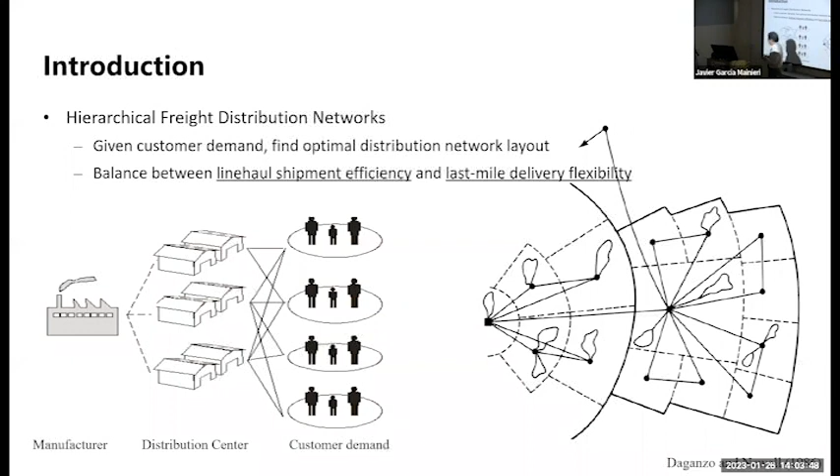You don't want a truck to visit you every day, do you? I hope not, because it has a lot of implications for safety and energy efficiency. So then the line haul, which is the part where you use a large vehicle to deliver to a neighborhood of customers, and then use smaller vehicles—you deconsolidate and break the bulk, then use the last mile to deliver to local customers. This last mile is much shorter in distance overall.

If you look at a delivery system, the line haul distance covers most of the distance traveled, ton-miles, whatever you call it. But the last mile is relatively very short in distance, yet it's actually more costly because you have to use smaller vehicles to visit customers, and it's less efficient in terms of cost. It turns out that last mile delivery covers more than half of the total cost, just because it's less efficient. So it's an important part of the puzzle.

Particularly in recent years, especially after COVID, with information technology booming, the last three years have really changed the landscape. E-commerce has been booming across the board, everywhere. I'm sure you order much more online than you did a few years back—at least I see that happening to myself. This has been a trend, and we think it will probably continue even after COVID ends. In the US alone, just to give you a number, in New York City alone, every day there are 1.5 million parcels or packages being delivered in a single day. So you can imagine how this has been changing.

In the past, you'd go to a store, drive there, pick something from the aisle, and go. But now it's actually delivered to your door, more and more so. Then the last mile delivery, mostly in the past, has been dependent on vans.

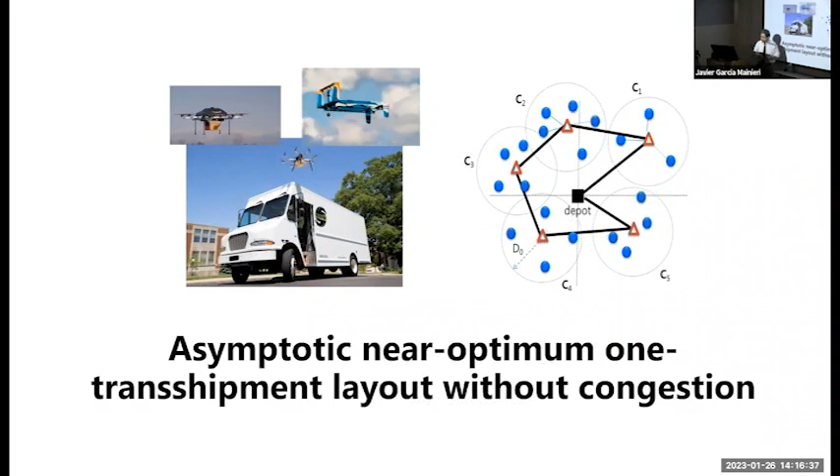So it turned out that what we're going to do is look a little bit into this system first, maybe as our first question to answer: if we were to do this type of system design - the trucks go out and temporarily stay somewhere and let the drone go out - what is the optimal way to do it? So this leads to this research question.

Suppose this question is the basis for the design - suppose we have a homogeneous area of space, just for the property of the mathematical system - essentially if you have a vehicle, the truck or floating warehouse that's going to be going around, how should this floating warehouse go around? What is the best way to route it? We want to save some distance that this truck itself has to go. Let me use 'truck route' to mean the big vehicle. The truck is going to go around, and where should the truck stop? How frequently should it stop? And then each time the truck stops, the drones go out to serve the customers. And then how big should this area be, and what shape should it be?

This is a computational geometry problem. How do you partition space into small areas such that you have this truck routed through it and minimize the total cost for truck routing as well as the drone travel? I hope this problem makes sense.

So this problem, we started looking at around 2015. We use some approaches - I'm not going to bore you with the details, but I actually had a little quiz for you, though I forgot to give it. I was going to quiz you all.

Like, if everything is homogeneous, what do you think this shape should look like? Roughly would be near optimal. I already reviewed it, I apologize.

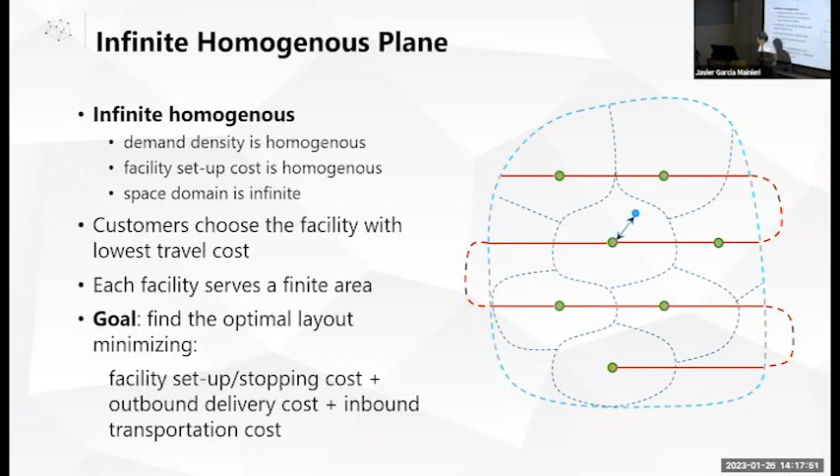There has been some research in computational geometry showing that if distance is measured, if drones really should be using Euclidean distance, that means going in straight lines, then actually hexagons are supposed to be good if we do not worry about the truck routing. But if the truck routing is actually under consideration, it turns out that this is not optimal.

I'm going to show you. So we have some results from the literature about how the space should be partitioned, but it didn't really consider the truck. So what we did in the past few years is figure out how we can route the truck.

There's some work that we did. I'm not going to go into the details, but essentially, it depends on: if the drones are flying directly, and if we do not worry about the truck at all, truck is free, then we should have hexagons. If the distance is by straight lines, but the drones have to fly according to a lattice—that rarely happens—but if that's the case, then we should have diamonds or slanted squares.

If we also consider that the trucks are going around, you understand that we have to find a way to connect all these dots—that's the truck movement. If we worry about this distance, which is a cost, then actually hexagons that are squeezed would be optimal. We prove that it's near optimal under different situations, and basically we prove that it's optimal.

So this gives you some guidance: under different situations, under different costs, you should partition space in these different ways. That's some of the work we did, and we proved it through some simulations.

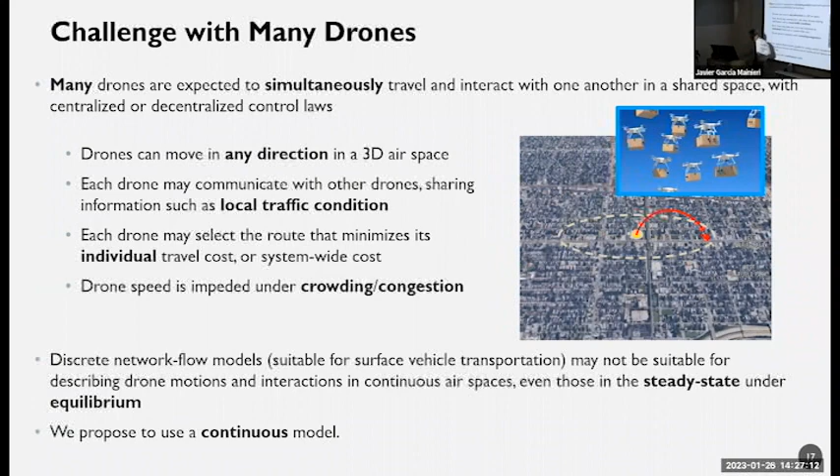So what we did is we utilized some of the ideas in the literature, and then we modified them to address this drone problem. We developed a so-called continuous model, a continuous traffic model, to describe it. This is only a few slides that have a little bit of math, but I will hopefully go through it really quickly. You don't have to worry.

Imagine this is one of the locations where drones take off, a launching location. Suppose this is the area around the drone launching location, and the drones fly out to serve this neighborhood. Then we can describe the local flux. We can imagine that in every little neighborhood in space, we can describe the local drone traffic by a certain flux variable.

And then we can assume that the travel cost of every drone in this neighborhood experiencing flux f(x) near x is the transportation cost per unit distance. It's like travel time per unit distance, like a pace. This is essentially an increasing function of the flux. So if you have too many drones in my neighborhood, I'm going to slow down. So this captures that local

congestion. You can imagine that if this is the truck stopping location, the launching pad, and these are the customers continuously distributed in the neighborhood, we have drones flying out, and in every location there's a flux, some flow going around. The speed for a drone to traverse that little neighborhood depends on how many drones are in that neighborhood. In this way, we can address drones flying in all directions, forming traffic, and causing congestion.

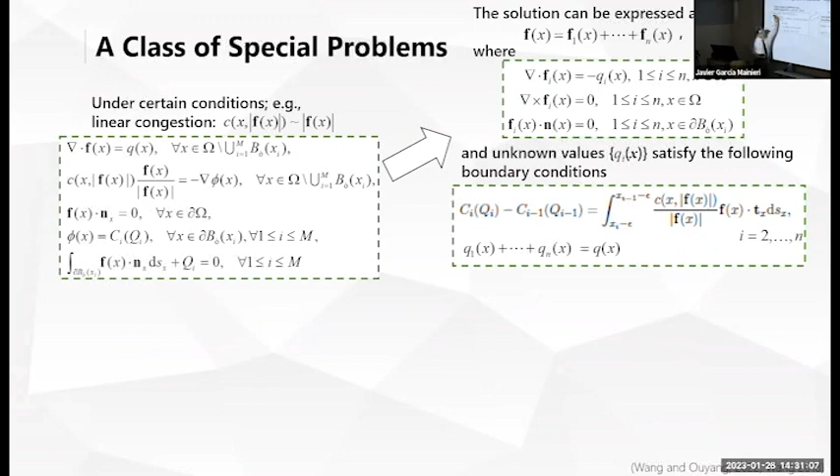Actually, I'm very proud to show you, but don't worry about any of this notation. This is an earlier slide. We were able to show under certain conditions, we can solve that partial differential equation analytically in closed form. It's not generally true, but for certain situations when the congestion function follows certain forms, we're able, I'll skip all this, we're able to solve the problem analytically.

I want to show this picture just so you get a sense. Suppose this is the area where demand is everywhere, this is where the truck is stopped, then the drones fly out or fly in, both ways. Then you can see this is actually the optimum path the drones should be following. This is actually a closed form analytical solution. This is the cost surface. In a sense, this is where the truck is parked.

As you move away, customer from here will travel the least cost way to the truck. I'm sorry, I should say the drone goes the least cost way to the truck. This is the cost value surface. And as you go farther away, there's more cost, obviously, right? But sort of the idea, this is how the flux goes.

Just to show you some solutions, this is also an analytical solution when we have arbitrary shapes of the area. This is a made up shape, but you have two trucks that are sharing the airspace, serving the demand. You can see some of the drones should be flying in a curvy way, just to avoid: there's a lot of drones in front of me, I should go around it a little bit, but you don't want to go too much around it. What is the optimal path I should follow to get to the truck? So these are some of the analytical solutions.

For our problem, we didn't really rely on the analytical solution because it requires a certain cost structure. For our project, we studied a more arbitrary cost function like this, almost like a BPR type of cost. Then this is a truck stop location, and we consider a domain around it, so we can imagine the customers are scattered in this area. That's my delivery customer. Then the truck is going to dispatch drones out, and then we can solve.

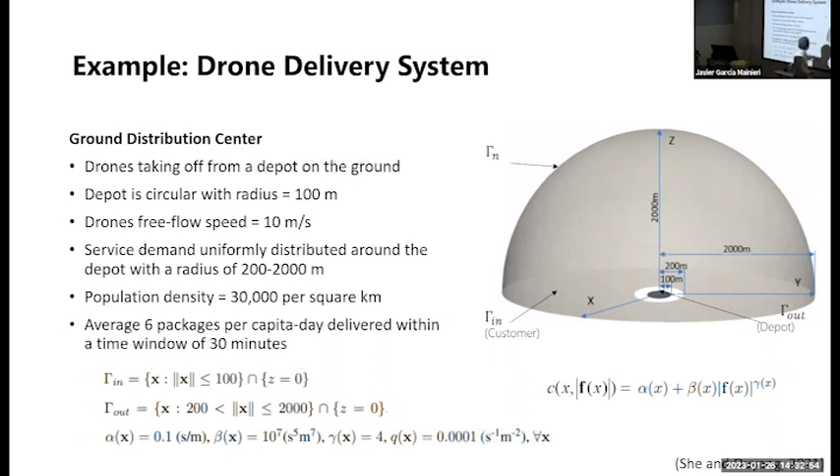I'll go really quick. We can solve partial differential equations by a finite element method. You guys are all experts, I'm not gonna bore you with it, but you can see we build this type of mesh, and then we use that type of elements. And then we were able to solve the problem and find out, for example, if a customer is here, how the drone trajectory should look.

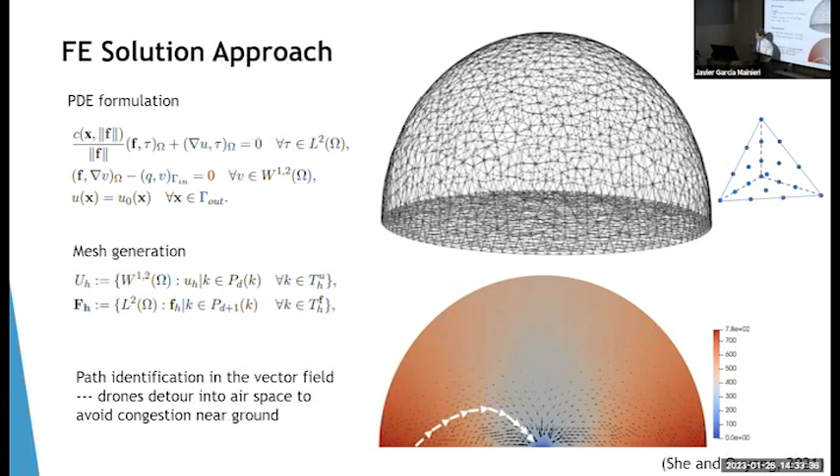See, the issue is that the drones are no longer flying near the surface of the ground. This would be the least distance way of travel, but because there is going to be a lot of concentration of drones around here, they have to go up and down to avoid the congestion near the surface of the roads. I don't know if there are any questions up to this point. I have been moving rather fast. Okay, if not, then we continue.

Then we did a lot of investigating the impacts of different factors. In urban settings, we may have barriers, buildings around, and even if there's no building in the rural area, maybe the FAA would have requirements that certain airspace cannot be used, like virtual barriers. So we were interested in knowing what would be the impact of the barriers. It's also interesting, for those of you familiar with network models, when congestion is present, having some barriers actually turned out to be better for the traffic. This is called the Braess paradox.

In a transportation network, sometimes you shut down a bridge and everybody is actually better off overall. That's because people are self-interested and behave for their own interest rather than the system-wide interest, right? Those of you who are familiar will relate to that. We were thinking that maybe the FAA should actually think about adding some barriers in a certain optimal way, such that the traffic can be improved overall. So that's what we did.

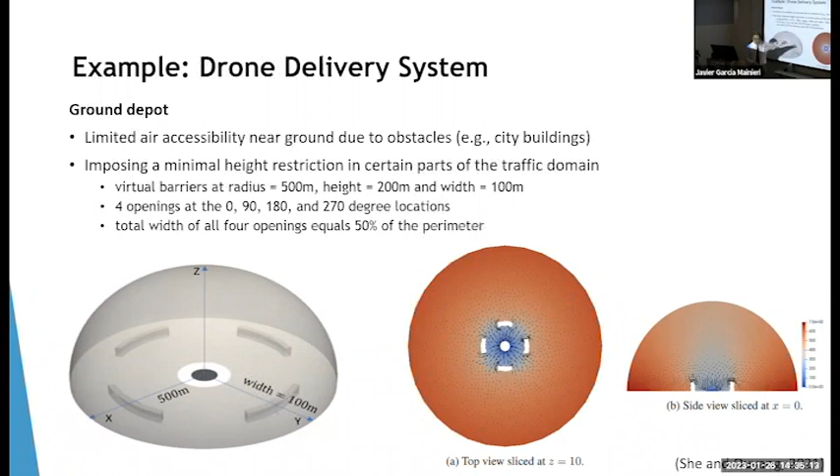We were trying different openings, as we call them: in a certain circle, what percentage of the area has a barrier, what percentage doesn't, and how high this virtual barrier is going to be. We tried all these different combinations, different ways of setting the barriers, different numbers. We can also evaluate the energy consumption as a drone moves up and down with or without a payload, and all kinds of movements. We can measure the energy consumption along the way.

I just want to show you a little bit. It's interesting: with some barrier, it's actually optimum in some cases. I'm not going to go into the details, but in some cases having a certain amount of barrier is actually the best. There's an optimal amount of barrier you want to add. If you add too much barrier, you're blocking everybody. This is not going to work. But if you don't add any barrier at all, it's not good either. You want a small amount of barrier sometimes to streamline the traffic.

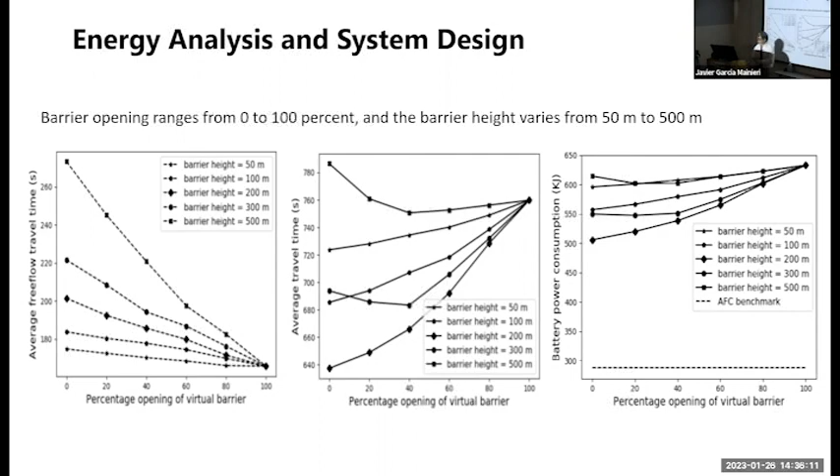It turned out that things work the best that way. So these are some interesting results we found, related to Braess's paradox. This is actually sort of a showing of Braess's paradox there. I'm going to go very quick now. We also studied the Amazon floating warehouse. Remember, that's another motivation for this study.

With this type of floating warehouse, the model changes just in that the truck goes to the air and then gets dispatched in the airspace rather than on the ground. We basically build the same type of mesh, similar meshes, and then we have traffic distribution and so on. You see how the drones sometimes, to avoid congestion here, go around and land from above. So you can see that congestion does have some effect on the traffic.

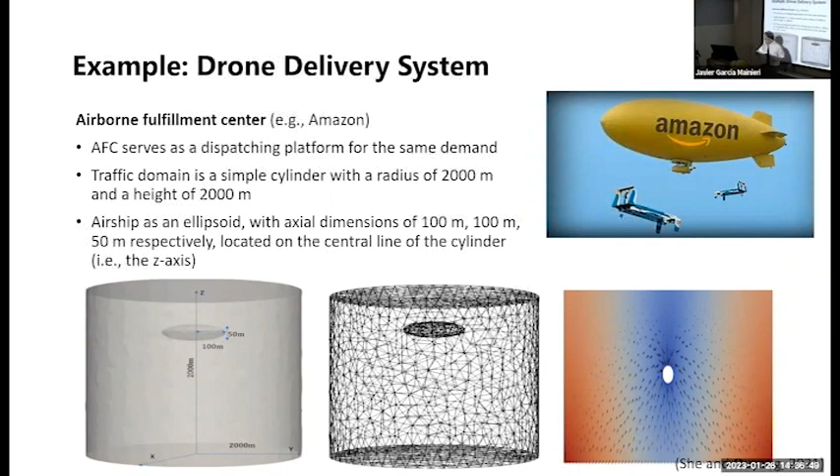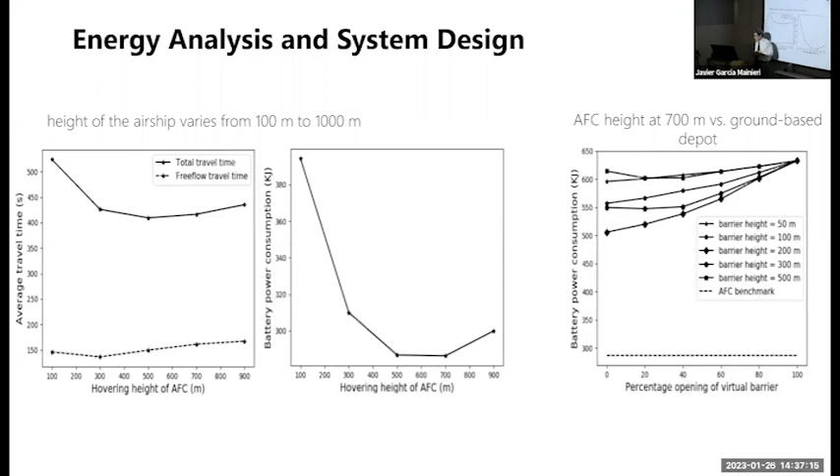We were able to play with this and try, for example, how high the floating warehouse should be. If it's too low, the congestion around it is too high. But if you go too high, it's too far; there's no need to do that. So there's an optimal height of the floating warehouse that's the best for the overall system. These are very simple applications that we play with just to have a little bit of insight about the system.

I hope I have time. How much time do I have now? Oh, I'm sorry, I'll finish in 5 minutes. I apologize.

Okay, so based on all the analysis, we were also able to show how we should partition space. It turned out that what we believe is the optimal way when congestion is present is what we call the curvy hexagons. So anyway, that's just to show you some of the work we did a few years ago.

What I'm going to do is quickly go over the last problem I haven't touched. I touched on the problem where the trucks go around and stop from time to time, and the drones go out, almost like flowers blossoming. But it's also possible that the trucks never stop, and the drone has to catch up after the delivery. This is another possibility we have been working on in recent years, and this problem is quite interesting.

You can imagine the problem now becomes: the trucks keep going and navigate through the entire surface of the city, and the drones go out and catch up later. So this is a very simple animation Yanfeng developed to show you how multiple drones can be dispatched from the same truck to deliver to customers.

So essentially, there is a big decision we have to make: how wide this service range should be. You could route back and forth many times and make it very narrow, or make only a few back and forths and make it very wide. Then the congestion here could be very significant because you have too many customers to serve. Does that make sense? So that's some of the issues we have to address in designing this type of system.

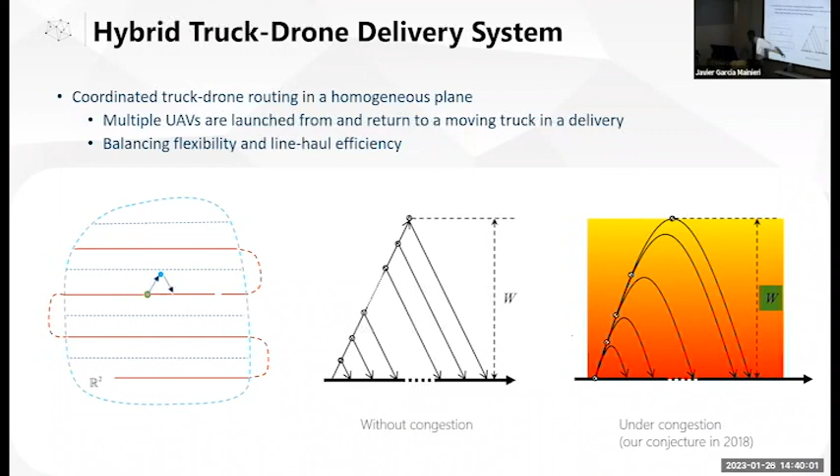We learned later, only 3 or 4 years after, that our earlier conjecture was wrong. It turned out this reveals the actual optimal trajectory of the drones. If we have a moving truck, the drones should actually move almost like that shape. I was thinking the other way around. Shame on me, but we made the best guess we could at that moment.

There are also a lot of interesting questions when designing this type of system that you need to address. I already mentioned how wide the service range should be. If I have a truck moving and the drone goes out to serve customers nearby, how near is nearby, how wide should this be? That dictates how much the truck needs to move back and forth to cover the whole ground. Also, what speed should the trucks be traveling at?

Another issue is how you handle different customers along the lateral direction, how you sweep through the area. Think of this as my service area, with the truck going around and sending out drones to visit customers. At any moment, a subset of customers is getting a drone visit simultaneously. I could sweep through you like this, or like this, or like this. Does that make sense? At every moment, a subset of you is being visited by drones together simultaneously, so what does that subset look like?

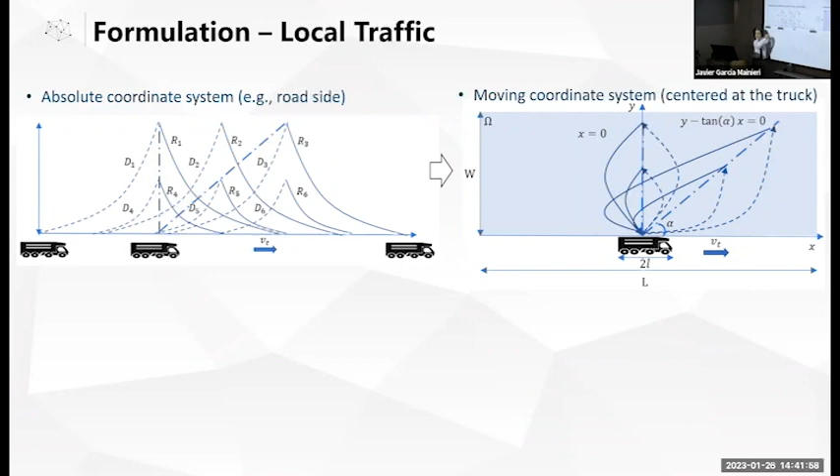Without further details, I'll just say we did some work to translate this system. From the perspective of a roadside observer, standing on the roadside, you'd see the truck moving and the drones flying like this. But another way to look at it is from the truck driver's perspective: the drones are just flying around the truck like a horsefly. So that's the trajectory of the drone in the truck driver's eye. By translating the problem into this change of coordinate system, we were able to develop the PDEs in a similar fashion, based on the densities of the drones.

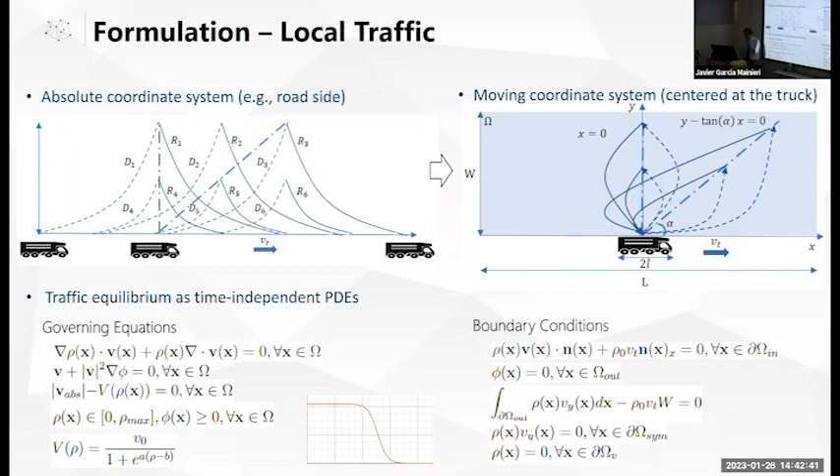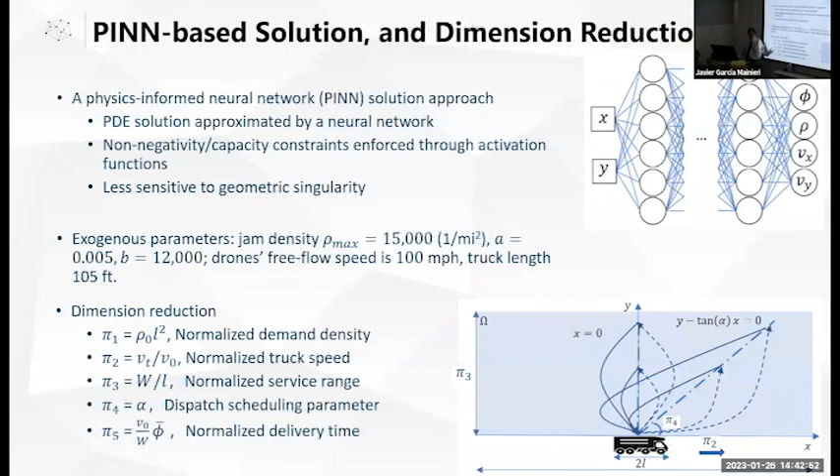There's some technical details where we changed the formulation a bit, which is better because we want to ensure safety by limiting the density directly. Then we were able to solve it. I'm not going to bore you with it, but we use neural networks to solve it. We also tried finite elements since we wanted to try something else. This is the solution.

I just want to show you a couple of examples where the truck is moving like that. If I were to sweep through you like this, 90 degrees, I'm visiting you guys like that. You know what I'm saying? The truck driver's view at any moment, my drones are visiting customers along these two lines at the same time. Or I could do it like this. You understand what I'm trying to say, right?

So these different solutions are choices of my service plan. This is the trajectories of the drones, showing how the truck driver sees the drones flying, and how a roadside observer would see the same thing, just from a different perspective.

We can play with this and test different speeds and service ranges and so on. One interesting finding is that if the truck travels too fast, this may not work because the drones cannot catch up anymore. We never expected that—we thought the faster the truck, the better—but it turned out the drones can't keep up if we do it a certain way. So it's actually quite interesting.

Whatever we do, we came up with this PDE solver that solves the PDE for any combination of parameters. This is like a black box we use to really design the service—meaning for any demand, for a given city, how do we make sure we have a plan for the truck to move around and the drones to be sent out.

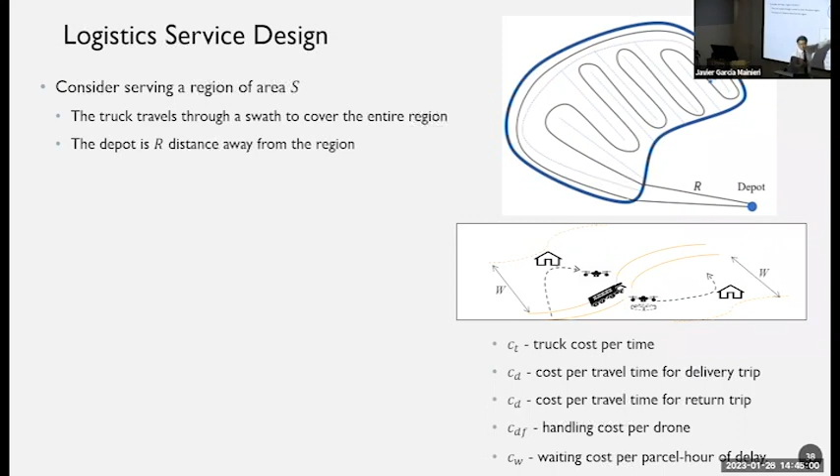Now the good thing is we have a way to measure the cost of doing it. This is a solution of the PDE, and that solution can be embedded and used as a model to estimate the cost for the whole city or area.

We won't bore you with all the math, but we have a way to estimate it, and we're able to figure out, under different combinations of speeds, delivery headway and so on, what is optimal—the choices of truck speed and width of service, how wide we want to go, those types of things.

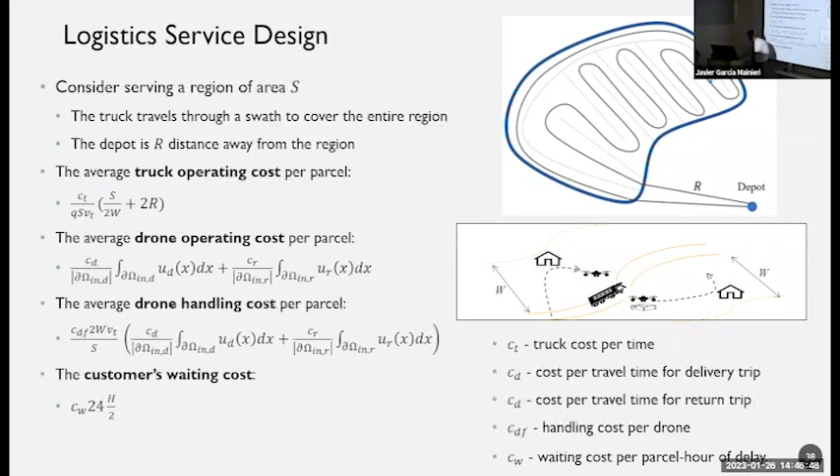And lastly—okay, I'm running out of time, one second—whatever we were talking about assumes homogeneous demand everywhere. This is also homogeneity here everywhere. But what if the city has heterogeneous demand? This is an issue we have to deal with in reality. Also, the streets may vary in density—certain parts of the city could be densely populated with roadways where trucks can go easily, while other parts may have a lot of parks and so on.

So if things are heterogeneous, the idea is to partition the space into neighborhoods, each more or less homogeneous inside. Then we have a way to solve each homogeneous neighborhood, finding the solution for each region. Then we find a way to connect all the truck routes together, and as the truck enters each region, we have a certain design regarding the speed and the width and so on.

Just imagine we have all this figured out, then the last thing is to find the overall plan for a truck route. This is actually very recent work that Rifeng has been doing. We were working with a few of you on designing this air-based delivery. We clustered the area into pieces, each with a more or less homogeneous demand and street network, so we could apply what we had before to figure out the cost of doing deliveries.

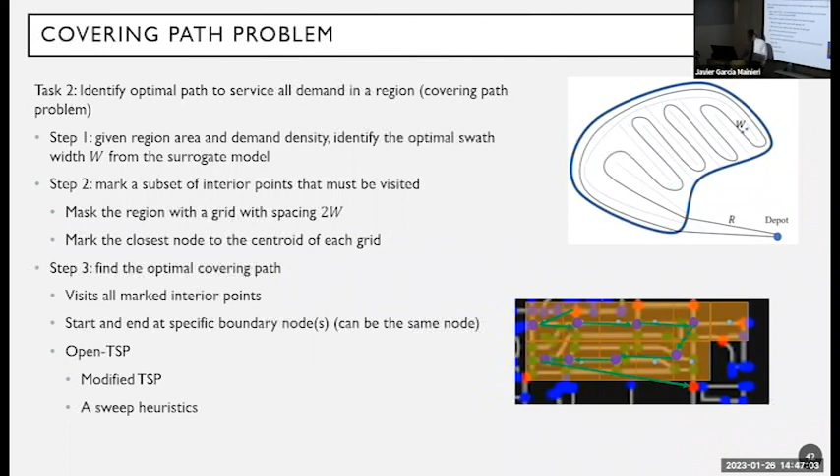The last part is that, as I mentioned, this is a homogeneous area, and this is a homogeneous area. We know how to do things inside, but then we just need trucks to go around and connect all those little regions together. We have the entire truck plan: when the truck enters an area, it follows the protocol we prescribe for that region, then changes to another protocol when it enters a different region. So that's the overall idea.

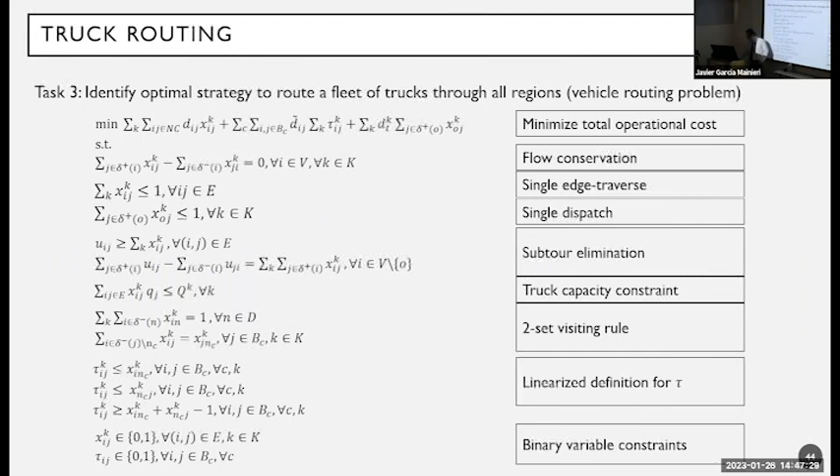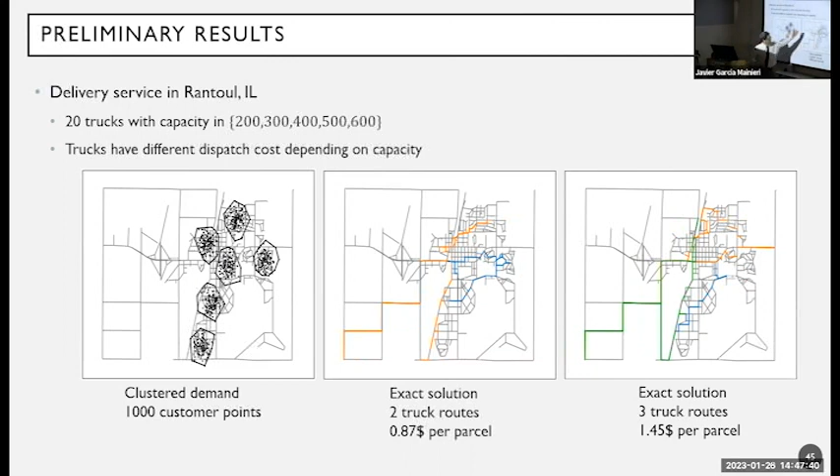I won't bore you with the details. We've been doing this, and hopefully some earlier results let us measure the cost of truck-drone combined delivery, energy, and so on, using this area as a case study. Recently, working with our group, we compared the cost and truck requirements against the current human-based way of doing deliveries there, and found some significant savings. The numbers aren't the important part—it just shows there's a huge improvement. We tried to use realistic parameters, but it's still just promising.

Anyway, I'm coming to the end. Last slide: where are we going? I hope I've been talking about freight the entire talk, but in my head, ever since I started looking at this problem maybe seven years ago, I've had this cartoon from the 1950s about the future of cities in mind—maybe we won't really drive vehicles in the next ten or twenty years, and instead we'll be flying a lot. I don't know how soon that could happen, but that's at least a futuristic view.

In that regard, the model we've been discussing for drone traffic movement in the airspace will directly apply—I hope you can see that. So we deliver people too, but also, in outer space, I think there may be an opportunity in the future to look into movement and related issues there. With this, I thank you for your attention, and I appreciate it. Thank you.

Yes, please. Hello, Professor, thank you for the great presentation. My first question is: how is the charging infrastructure shaping for the drones, and how will it play out in this optimization problem?

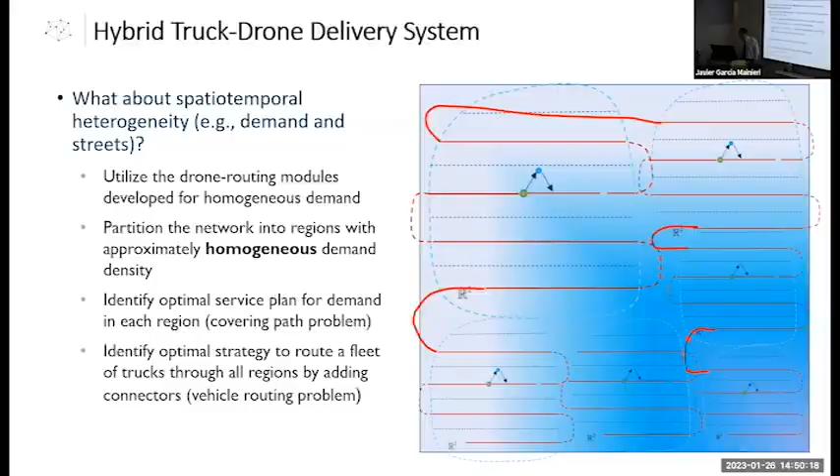Our model is continuous—that's an excellent comment. But we describe drones using a so-called density function. I don't know if I defined it here, but this density has a minimum requirement and also a maximum density, meaning drones have to keep a certain separation from each other. In a sense, this is the whole reason we changed to a density-based formulation—so we can enforce this requirement and ensure every single drone stays at least a certain distance away from another drone. Does that make sense?

But when we describe the collective behavior of the drone population, we use the fluid approximation. We use flow, flux, and density to describe it. This ensures that we have at least a certain guarantee of safety.

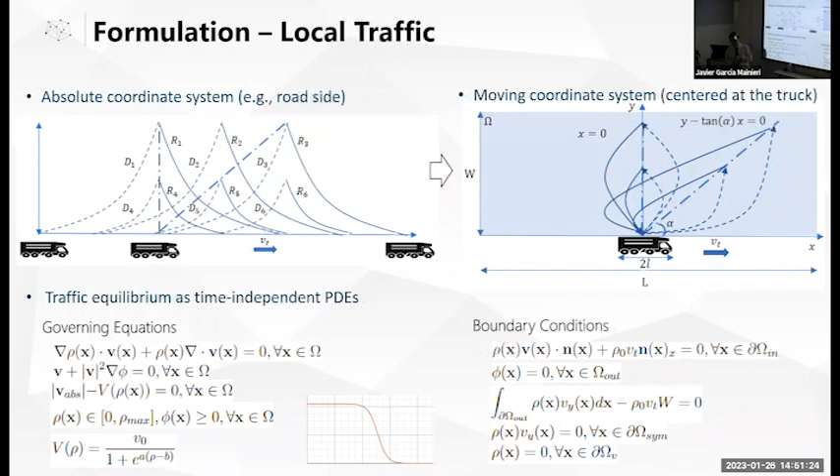Just a quick follow-up. In the earlier static formulation where the truck is static, was velocity a variable for the drones? I saw the trajectory is the only solution you're obtaining. Was the velocity of the drones also part of the equations? I'm not sure which formulation you're talking about. You mean the previous one? This one? Yes, oh yes.

No, the velocity is part of it. Sorry, I went too fast. I think this here... This C function is actually the inverse of the velocity. This is the cost, or time, if you think of time as a cost per distance. So this is the cost per traveling one unit of distance. This travel time cost, if you define it, increases with the local concentration of jobs. So it's considered.

I was just curious, how do you impose a conflict? What I mean is, if Amazon and UPS are serving the same area with different demands and truck routing they want to optimize, how can this model incorporate that? Because each pattern ends up serving a specific route for that entity, and they run in parallel, but how do you impose a conflict in an already messy problem like this?

Short answer, we haven't considered that. That's an excellent question though. Angela's question was, what if we have multiple companies running different fleets and their drones end up conflicting? We haven't considered that at all. That's a wonderful question. But I think it can be addressed if we just...

That's actually very challenging, but think about it. We were talking about the route choice of drones in continuous space, looking for the trajectory for each drone. But imagine another company also has a whole bunch of drones flying around. A simple, first-step approach is to assume we solve each company separately first. We solve this company, find the optimal solution, and we can iterate. We solve this company, find all the drone movements, corridor use, and so on, then fix it and add that back into the background.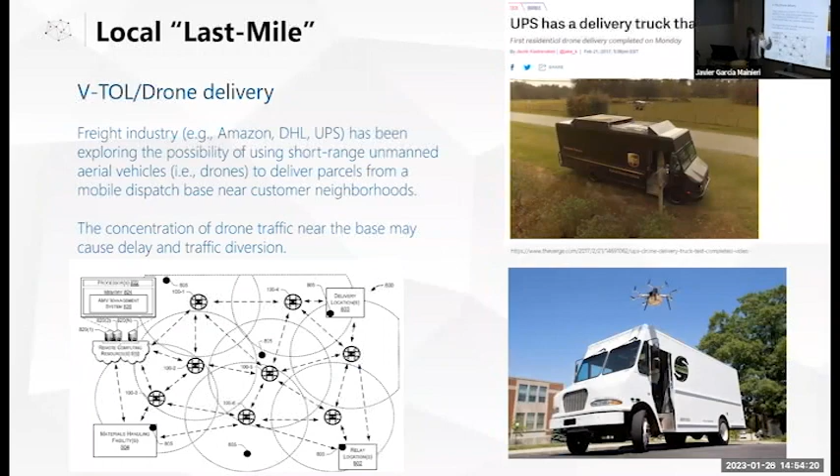But I want to say that companies have been trying to address this truck-drone combination—that's a huge issue for them. UPS has been doing it for a couple of years already. They haven't been worried too much about congestion yet. I really hope I could...

How are the drones flying, are they flying on their own? Yeah, they are actually centrally controlled right now, I think. Oh cool, not autonomous. There are also autonomous ones being developed—our mechanical engineering colleagues are working on that a lot, self-aware and self-routed drones. My work can handle both; we allow for centrally controlled and decentralized systems.

To be honest, I'm not too sure where we are in terms of academic development, because colleagues in mechanical engineering, like Professor Naira, are developing those drone local control and decentralized control protocols. We probably should ask her next time about where we are now. She was here last year—oh okay, yes, that's right. So they work on the hardware, and I work on the software side of managing this traffic.